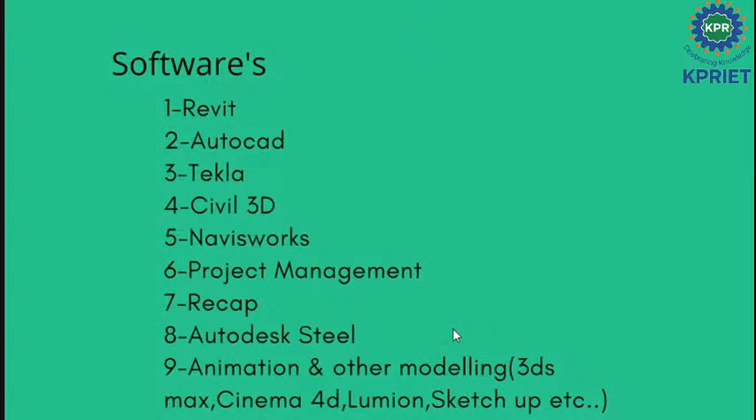I think these are the overviews for BIM, and I'll just show one small sample.

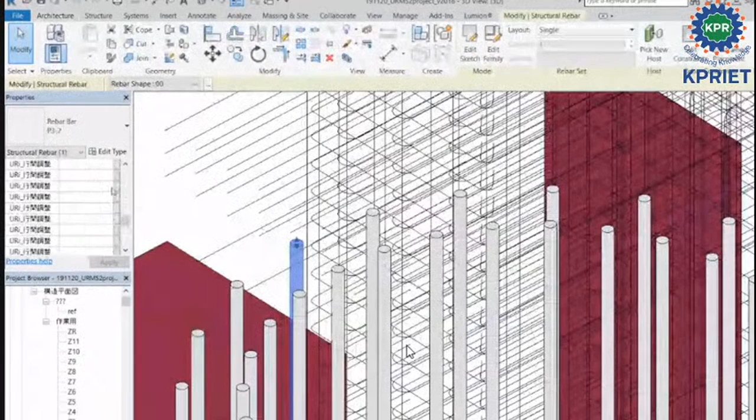I think you can able to see this one. This is some rebar project we did, in Revit, actually some Japanese project. So you can see this one, it's a bar dia of 38 mm.

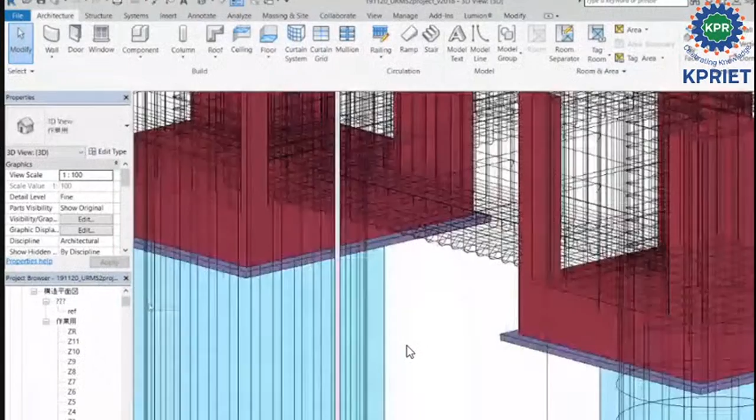So whatever the mm we are using, you can see this one, this is some overall view. The number of bars involved in this model will be very huge. So what happens is a lot of clashes will be there for each and every bar, it will go inside another bar like this.

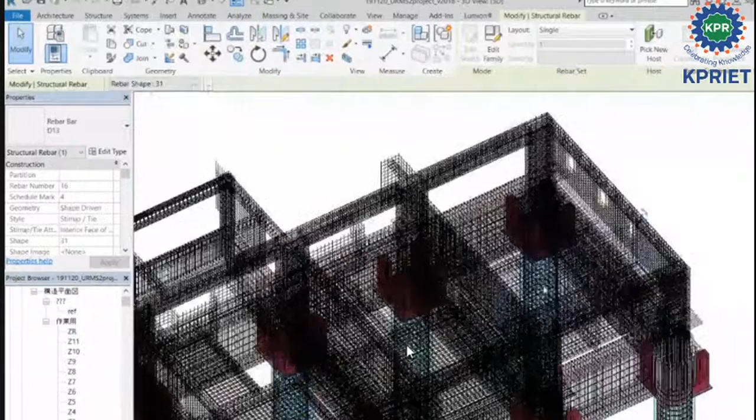Currently I don't have any other samples to show, so these are just basic samples for rebars. In Japanese, this project was done for one Japanese client, just overall views, nothing more in detail, just for your purpose I'm showing this.

You can model all these things, but I can't change it to 3D right now because it's a very heavy model. We need a very high-end system to run this model.

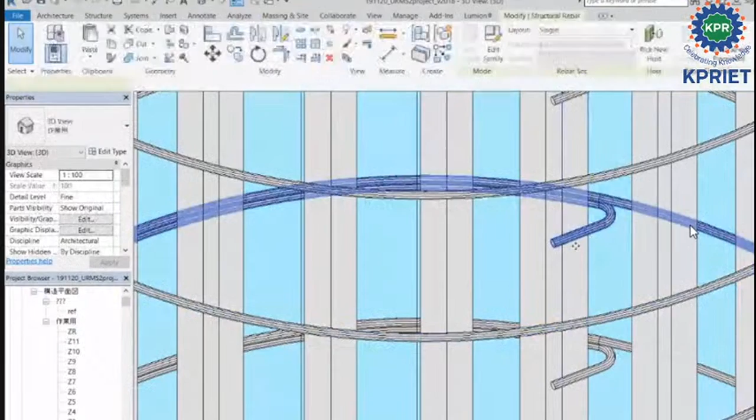Okay, this is my overall view. If you have any other queries, just let me know. I think the remaining section will be taken by Abdul. Thank you.

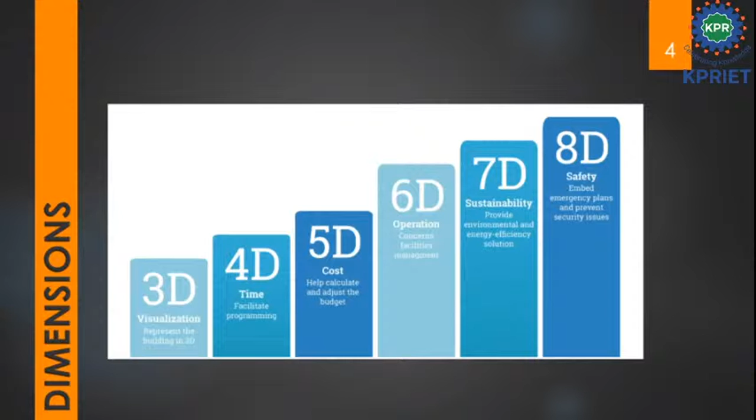If you drag to the timeline, you will have a planned schedule, even before construction. If you drag to a particular time, you can see the condition or the completed stage of that particular building.

If you want to compare the planned and actual, you have to update the actual schedule based on the DPR, the daily progress report you get from the site. By combining the actual schedule with the building model, you can compare both, how much you should have completed and at what stage it's actually completed. This helps you find which part or member of your building is taking much longer to complete, so that in future you can rectify those problems.

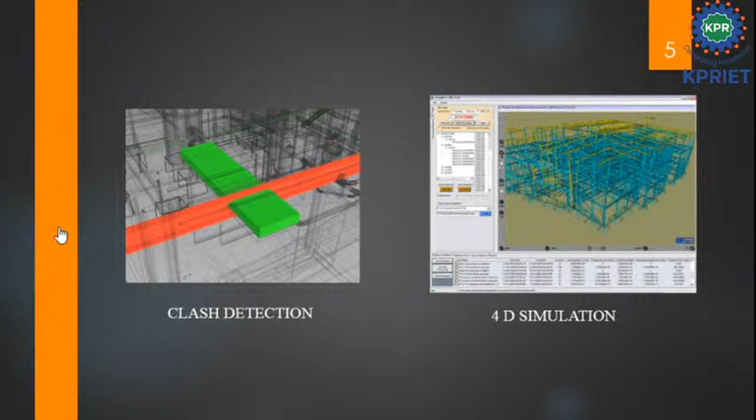Next will be the benefits of BIM. Basically in construction, we have to utilize our resources in an optimal way, and the time is the essence of a contract, so we have to finish the project within the stipulated time. Once we exceed the given time, we have to pay penalties or incentives to the client, or the consultant might claim some amount based on that.

So we have to minimize the delays. By using the BIM model, it will reduce the amount of rework that has to be done. For example, you construct a building and the client is not satisfied after construction, so you have to demolish and reconstruct. Those types of reworks can be avoided.

One more thing is finding the clashes beforehand, like what clashes might happen during construction, so proper coordination will be there, and it also increases your productivity. Like the materials you have ordered will be received on site on time, so they will be utilized properly.

Coordination means the infrastructure team, the engineering team, and the contractor team will come closer around the model. They can utilize the model and raise questions in it, so it can be easily rectified. For example, if you don't want a window or door in a particular space and want to change the position, it will automatically reflect in the design of the building.